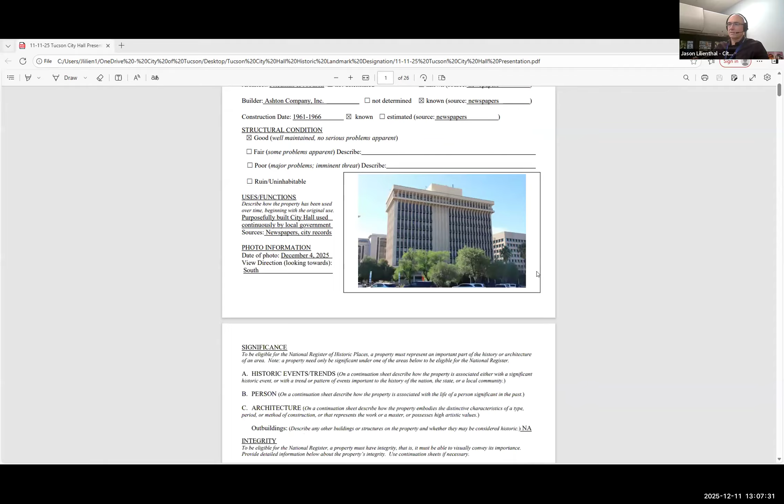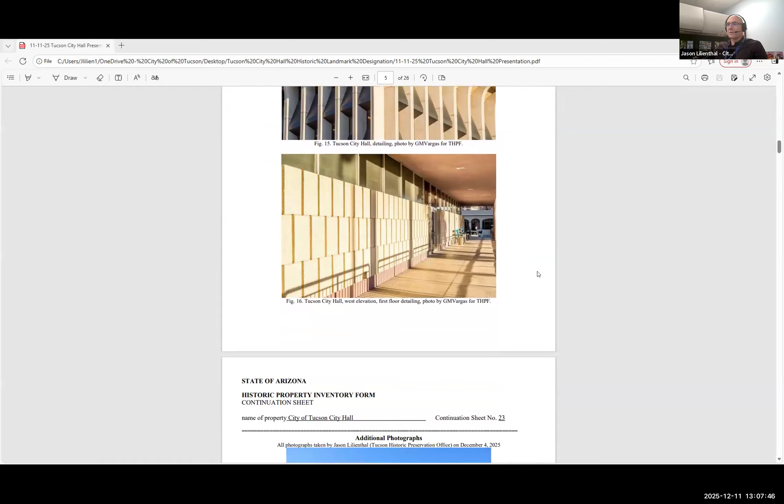It is eligible under two criteria: Criterion A, politics and government, and Criterion C, architecture. Under Criterion A is the association with Tucson political history. Tucson City Hall was built between 1961 and 1966. This is the third and only remaining City Hall building, and was the first new civic building erected downtown during the urban renewal era, predating the Pueblo Center redevelopment project approved by voters in 1966.

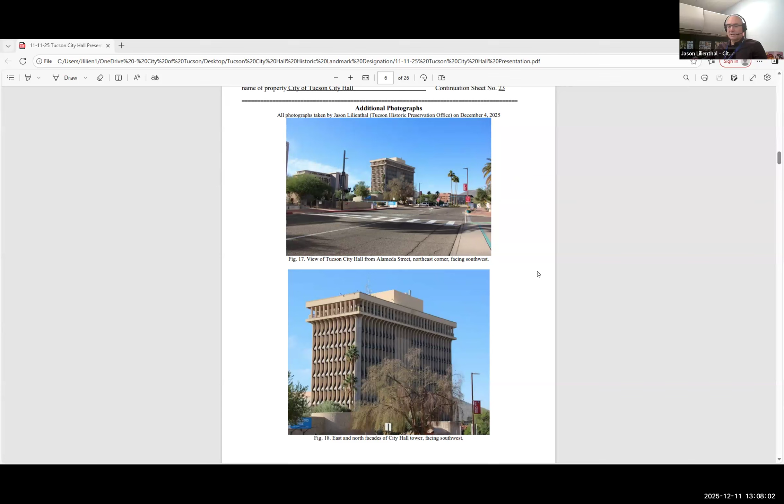Under Criterion C, this was built by local architect Bernard Friedman of the firm Friedman and Jobusch. It is designed in the brutalist architectural style. One of its character-defining features is cast concrete construction with steel beam framework and anodized metal copper. Its fenestration is recessed with overhangs to provide shading from direct sunlight. On the 10th floor, as well as the 2nd floor, there's a decorative screen of gold anodized aluminum rings arranged in a geometric grid. The design reflects its Sonoran desert climate with desert color tones. This concludes the presentation.

As Chair Majewski was mentioning, one of the things we're looking for is a recommendation from the Tucson-Pima County Historical Commission Plans Review Subcommittee, whether it's approval with conditions or denial. If it's approval, we will take it to the planning director, and there will be an official letter of notification, and then from there we go through the process. I can speak to the process if the commission would like to hear that.

Sorry, I was on mute. Would that be helpful to hear a little bit about the process? Does anyone want that, or are they familiar with it? This is Joe. I'd like to hear just a touch.

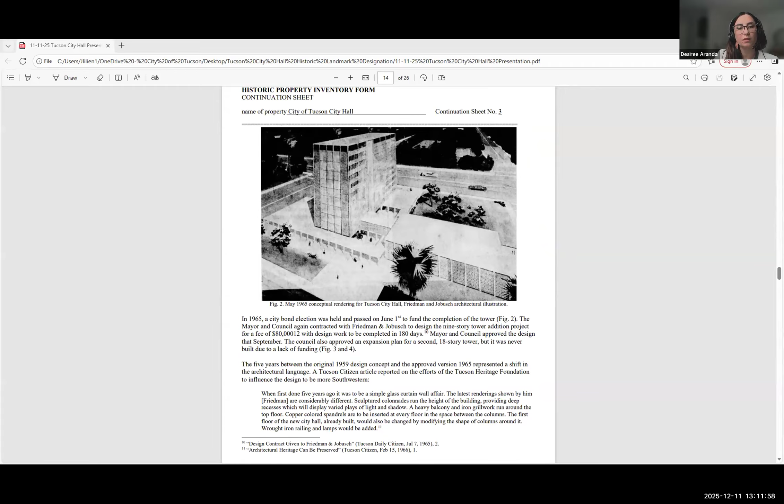And one other thing that I wanted to mention, mayor and council directive was to focus on the exterior of the building. And so we do document the interior, significant public interior spaces in the inventory form, but the final ordinance that will get adopted by them will most likely only pertain to the exterior. So that's something I wanted to mention. That's the direction that we were given.

So you put it in the HPIF format, and then there is also, this would be for a city landmark, right? That's what we're doing. Right. And for the UDC, there are different options, we can either accept a National Register nomination or an inventory form for the local designation. But it needs to be, was that changed up? Because it used to be that it had to be a nominated property, or does it just need to be an eligible property?

That is a good question. I have the ordinance here in front of me. Let me take a look at that.

And I do want to acknowledge the Tucson Historic Preservation Foundation, who originally submitted the application. Jason may have mentioned that, I'm not sure, but they submitted, they wrote the initial application. And so the inventory form really is based on their work with just some minor things added. And to your question, the ordinance says which are individually listed or are eligible for listing on the National Register of Historic Places at the local, state, or national level of significance. And this is at the local significance.

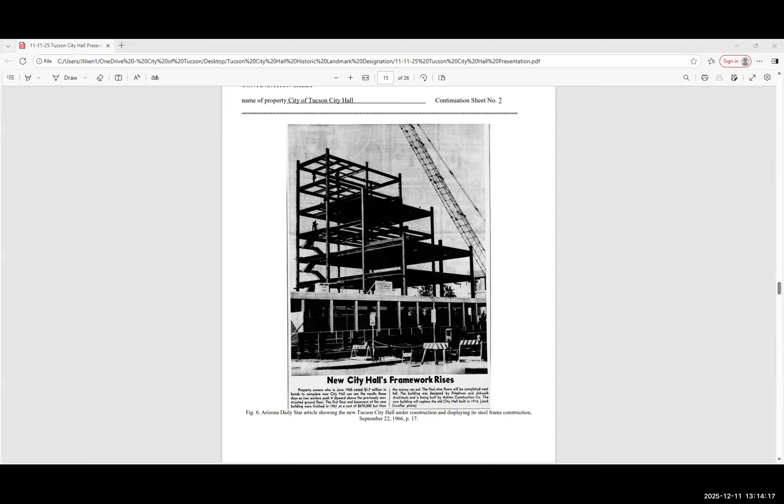And so for those people who don't know, what does it mean if this becomes a Tucson landmark, for the property itself? Just so that that's on the table. Sure, I can answer that.

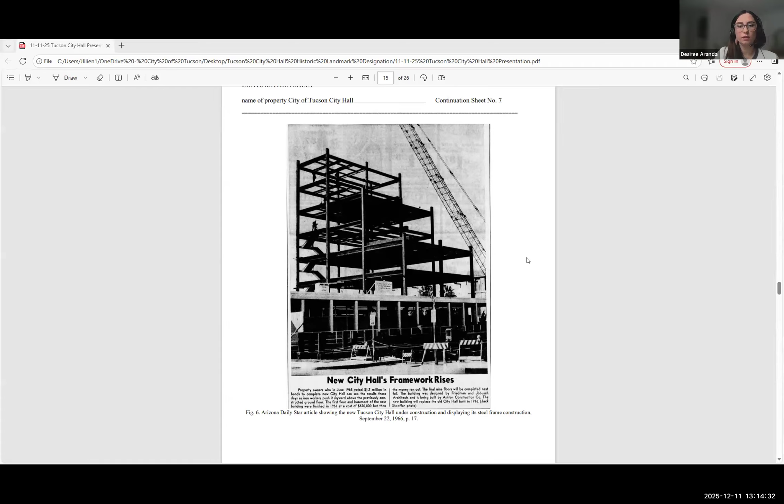So essentially this becomes a local landmark, which is an overlay, a zoning overlay. So the underlying zoning would not change, but this historic landmark zoning overlay would be added on top of that. And so any future development projects, proposed building alterations, again focused on the exterior, would come through the Historic Preservation Office for review. And so that would be subject to the review standards as outlined in the Unified Development Code 5.8.9. Because this is not in a historic preservation zone, it's just an individual landmark outside of that zone, any type of zone, the review body would be PRS, so this review body. And then any recommendation on those proposed alterations would be given to the PDSD director, who ultimately makes that decision. And those decisions are appealable to mayor and council. So essentially it provides some protection, there's also protection against demolition, right?

They're pretty... there's a specific process outlined for historic landmarks proposed for demolition. So if in the future this building, for whatever reason, was proposed for demolition, it would have to go through a process that ends at the mayor and council, requiring their approval before it can be demolished.

Basically, the city initiated the nomination—the mayor and council did. So it's not likely that the city will say that it doesn't want to have it, correct?

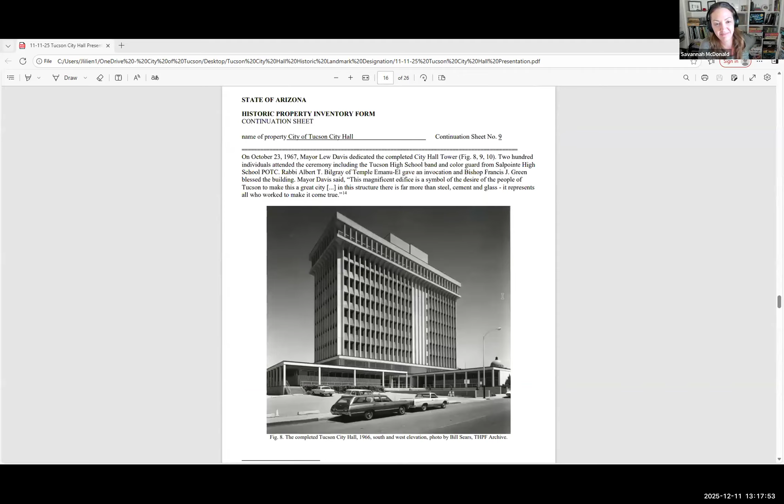Okay, cool. Yeah, I read through it thoroughly. I felt like there were just a few things. You had asked us a while ago to look at the character defining features, and some of them are a little bit missed or not described enough. One is the concrete panels on the first floor—I don't even know what they are because there's an image but no description. I think they're pretty special, pretty unique. It looks like cast concrete, like a veneer or something like that.

Also the colonnade of the first floor, I think, is pretty significant—it wraps around. That's mentioned a little bit, but not as a prominent feature, which I think it really is.

And then, within the cover sheet, or the second page, when windows are described, they're just called glass windows. I think there should be a little more specificity there. I actually marked it up a little bit—I could share it with you—but I think saying aluminum framed windows would help.

Especially since they're almost full height at levels 2 and 10, where the screen is—I think that's pretty significant, those two levels having bigger openings, more full-height storefronts. It looks like at the second level they've infilled some of those panels or put some sort of film on the window to block the sun more. I think that's happening on the second and tenth levels.

And then I think it's a copper panel, like a spandrel panel, so that should be mentioned under wall sheathing. Those copper spandrels are pretty cool too—I think that's what they are. There was another little snippet, maybe in an article, that mentioned it.

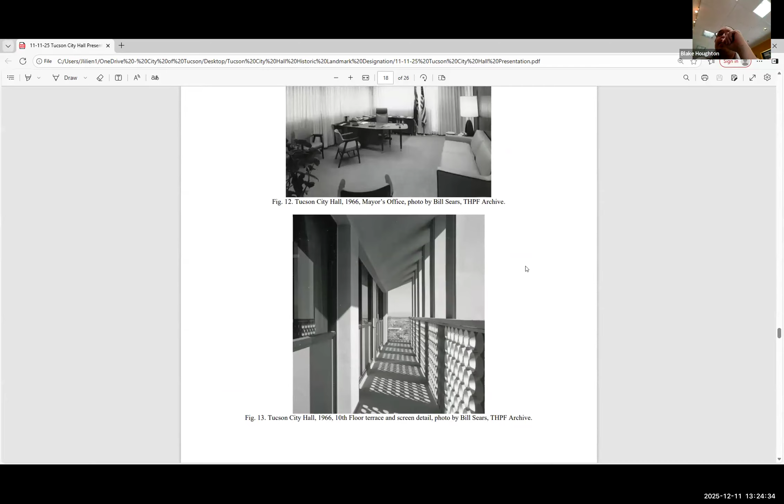Okay, thank you Joel. Blake, did you have anything to add? No, this is my first PRS meeting, first real run through, and joining this was a little chaotic for me. So I think all of the comments that have been made are good, and I'll just leave it at that.

Okay, thank you. I think what we should do for a motion is—so what is the schedule on this, Desiree and Jason? If we continued it, you've heard our comments and all that, but I think our main area of concern is the interior. And we've had this before. There was a property that...

The Tucson Historic Preservation Foundation brought forward one of those really interesting mid-century modern houses that had a big glass exterior. Do you remember? Are you familiar with that? It was before your time with the city, Desiree, but there was concern about interior modifications, because it was so critical—the whole interior worked with the exterior. And this is not quite the same thing, I don't think. How do you feel about that?

About waiting until you get clarification, or how do we structure a motion that would say we recommend moving forward with approval, but with the comments we've brought up and edits to the form, and also that some level of attention has to be given to the interior—but I'm not sure how we say that.

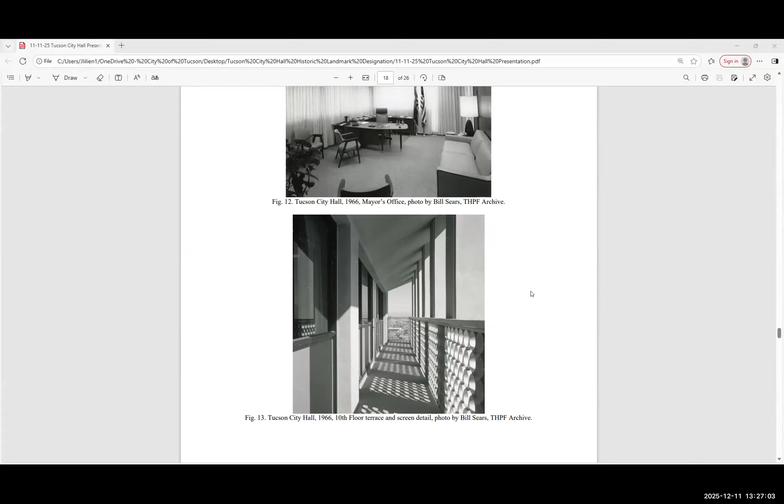I mean, if we could frame it—what do you think, commissioners? Do you think we can just frame it to cover those points?

I think so, possibly, yeah. My fear of pushing back too hard on the interior portion is that mayor and council may say no, and then just not list it.

In tandem with that, the other thing I'd want clarity on is where does that boundary of the exterior start and stop? Because the way the portico is designed, with steps that are integral to the portico and some hardscape elements, there's a really blurry line between the outside of this building properly and the greater civic plaza around it. It doesn't talk much about the greater plaza, but there is an integration there, so I'd want to be clear on the boundary.

To that point, I think Desiree had asked us, and I'm not sure I thought about it quite enough yet, about the landscape around it too. You wanted us to consider that.

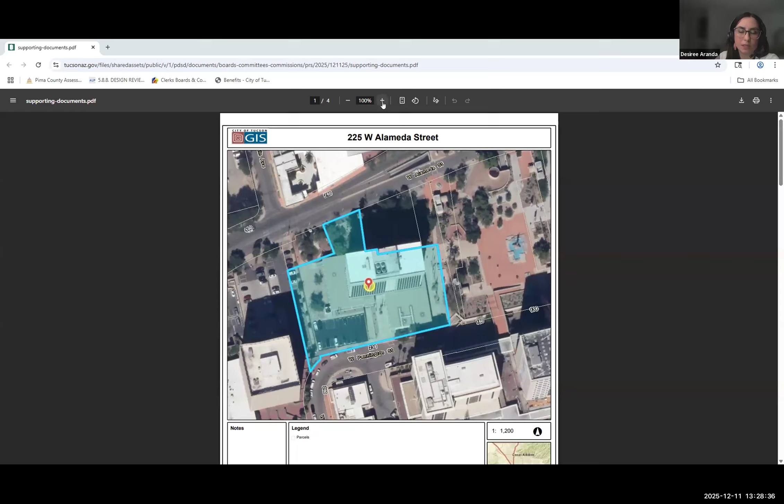The exterior, the first floor exterior, and exactly what Andrew was talking about, those landscape and hardscape elements - that might be the better way to describe it - like the steps that lead up to City Hall. I think we can certainly capture that in photographs, but if you all have thoughts about specific features to call out in the landscaping or hardscape surrounding City Hall, we could add that.

If we could go on a site visit or something, just walk around - I don't know if the boundary highlighted here captures everything that we possibly might want to include. This is the parcel boundary.

This line of questioning hits on something that is near and dear to my heart professionally - where does the building stop and where does the landscape stop? I think focusing on elements that were part of the original approach to the building, particularly because so much of that plaza is hardscape, instantly become parts of the landscape that need to be included and documented.

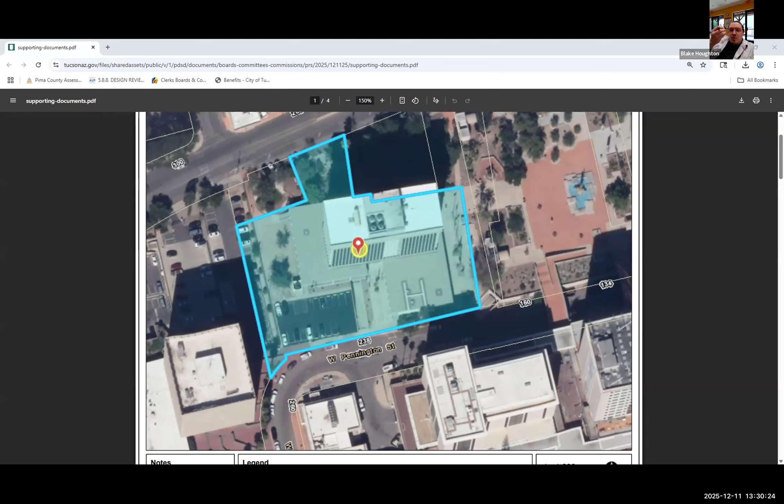At least in terms of ensuring - what is the word that I want? I was not prepared for this meeting. It'll come to me later, and that's going to drive me nuts because it'll be in the middle of the night. That essential quality that makes it historically significant.

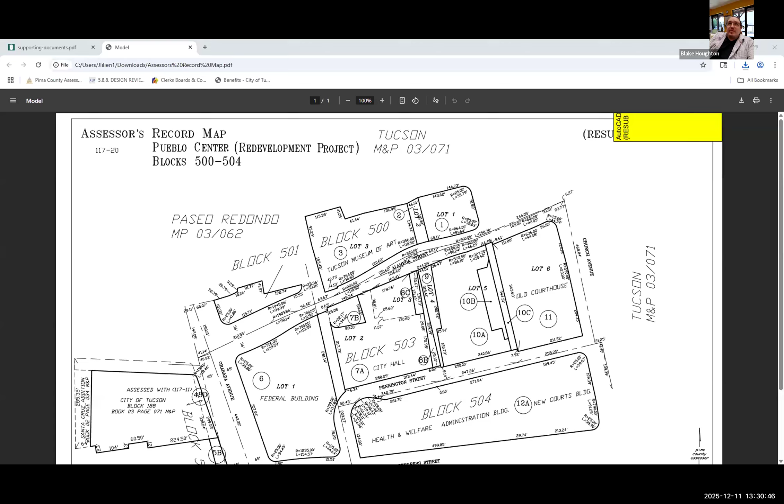Like a character defining feature - yeah, character defining features. But I think, because the plazas are in and of themselves designed spaces...

Do we know what the relationship between the plaza and the building was? Apart from what it is now, was the plaza designed and then installed around the building as a result of that? Was it designed by Friedman and Jobusch? You know what I'm getting at.

There's a certain part of this where some of this could be included because it was designed by them, or included as a feature. That's a whole bunch - landscape and where we cut that line becomes very complicated.

We've requested from the microfiche of all the permits that we have to see if we can get hold of the original design. We don't have that currently, but once we get that, it might give us some more answers. We can certainly try to do a little more research, see if we have photographs that could tell us. But my sense is there's not a ton of landscape right around it, and my sense is that it was part of the original design - I don't know how much of it has changed, if at all.

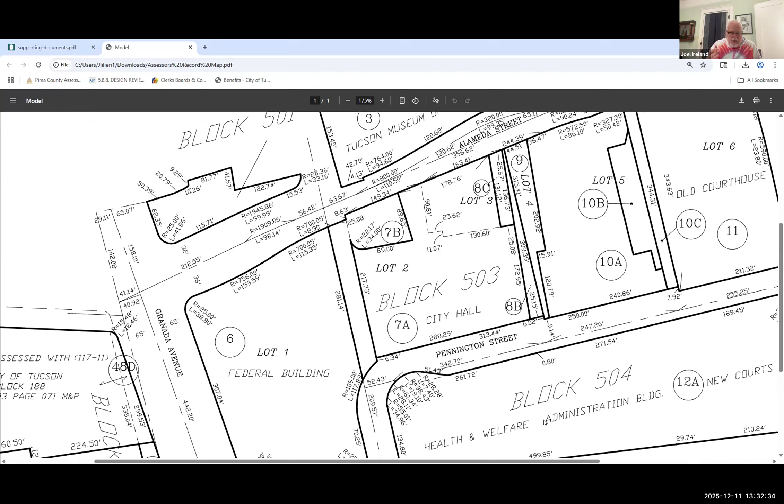This is Joel, and I'm agreeing with this whole discussion. One way to approach it might be that we recommend it move forward with a couple of caveats, so long as we're in compliance with the provision of the UDC that Andrew pointed out, and there are clarifying definitions of the interface with the original appearance of the hardscape and approach to the building, or something like that. I can't form the motion, but that's just maybe one approach.

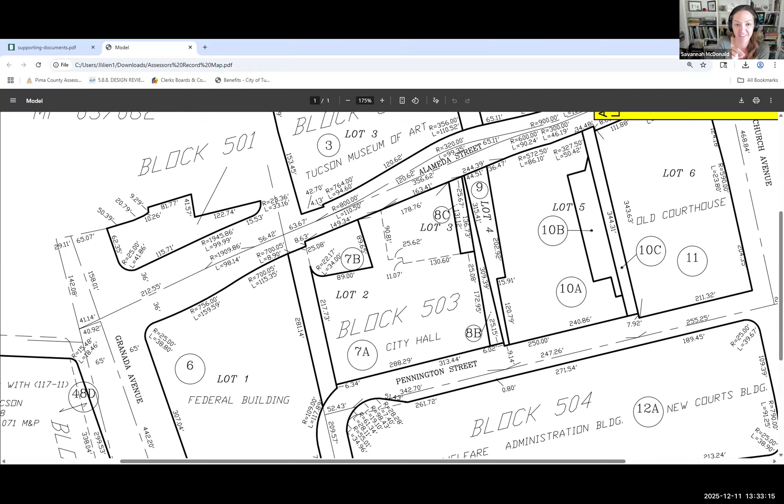I was just building on the previous comment. I've done the HL before with a very specific boundary, like 5 feet off the wall, including the yard of the street - fine tuning more around the building to capture within the HL. So it seems like that might be a more comprehensive approach.

So do we feel like we can craft a motion with all those caveats, or do we need to continue it? It would be you or Andrew, or you two putting your heads together on the motion with us weighing in. Is there real pressing urgency on this, Desiree, from mayor and council?

I don't think there's urgency for mayor and council. I know the Tucson Historic Preservation Foundation would like to see it move forward. Also, the rezoning process can be a 6 to 8 month process, so that's just to keep the overall timeline in mind. But I'm not sure that continuing it would severely delay things.

Your next meeting is January 8th, so that's a month away. I think in the grand scheme of things, that's not a lot of time added. As long as they don't have a big ceremony or something planned on a specific date that we're going to blow, then - yeah, that's my feeling. I don't know how everyone else feels, but I would probably want to just continue it.

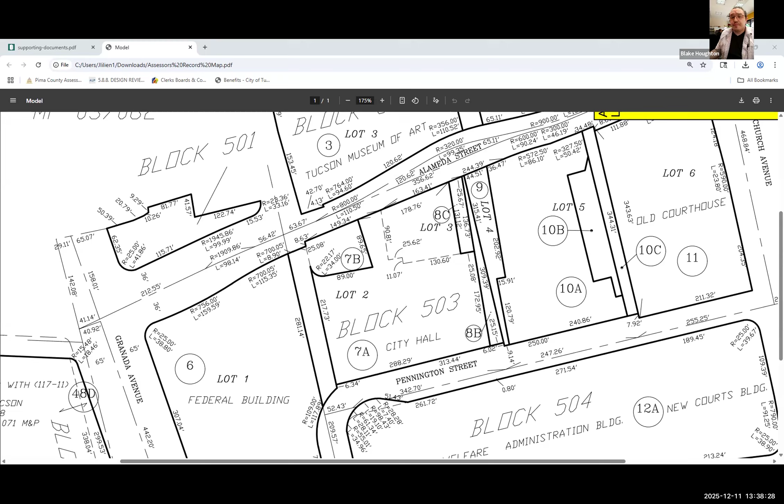Okay, is there a second? I'll second. Is there further discussion? Okay, if not - Terry votes aye. Andrew? Okay. Blake, aye. Joel, aye. Savannah, aye. Great, so it passes unanimously, and Andrew, email that to us so we have that.

And I think that's smart. So thanks for all the preparation, Desiree, you and your staff did, so that we can move this forward at some point soon. Thank you all for your comments.

And if commissioners would like to do a site visit, as long as there's not a quorum, one or two of you, I would be happy to arrange that or attend with you all. If there's a quorum, then we need to agendize it - all you have to do is agendize it. Yes.

Item 5 is historic preservation zone review cases that we review under UDC Section 5.8/TSM 9-02.0 Historic District Design Guidelines and Revised Secretary of the Interior Standards and Guidelines.

Case 5A is SD 1025-00158/TCRES 0725-03553 at 330 East 13th Street. I'm going to go ahead and turn it over to Michael Taku for background, please.

Yes, Madam Chair. The project before you—let me make sure the applicant is here today. I'm here, Michael. Okay, so we'll make you the co-host when I finish with my presentation. So the project before you,

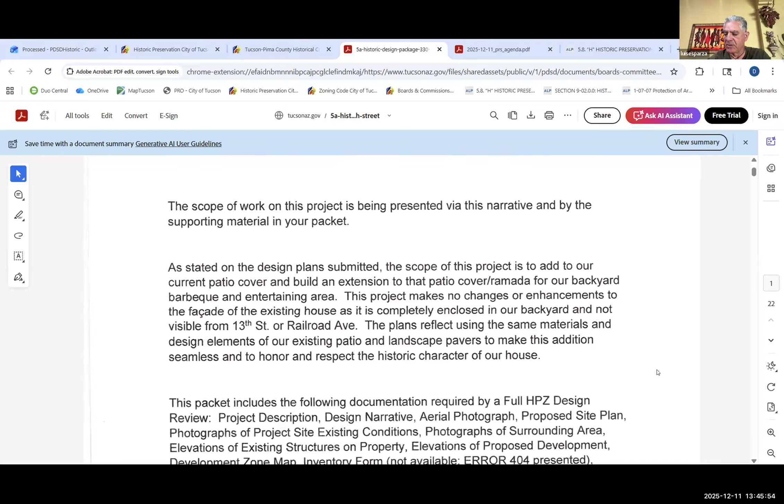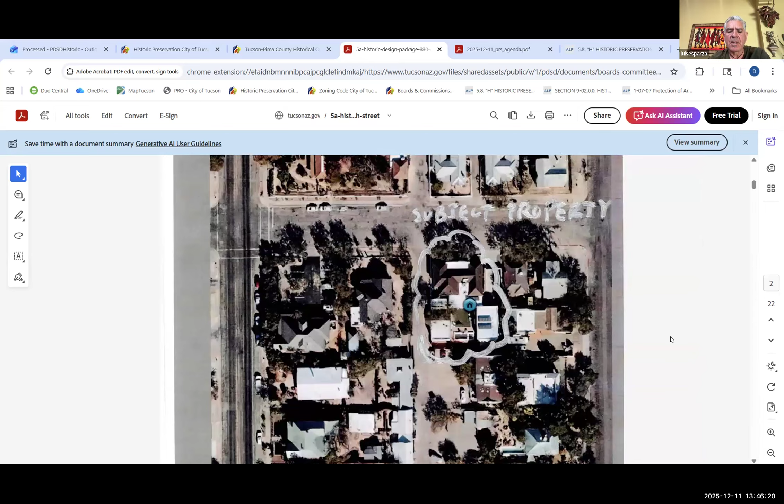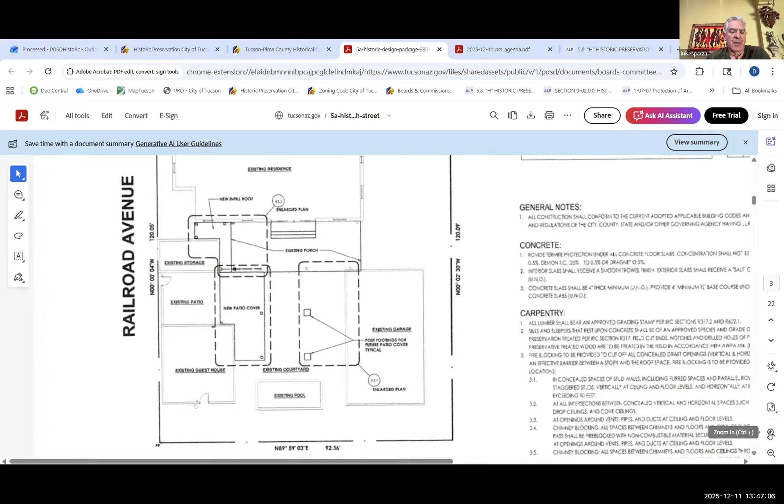Due to some requests, we submitted to the Armory Park Neighborhood Historic Association for review in November of this year. The project is basically an extension of our patio to cover our barbecue area and provide extra shade. Part of that is an extension of the current patio cover and the infill that Mr. Taku referred to. As you can see on the screen, the infill part is basically a 9 foot by about 15 foot area that runs east-west, and a 5 by 18-foot area that runs north-south between the existing house and the existing storage area.

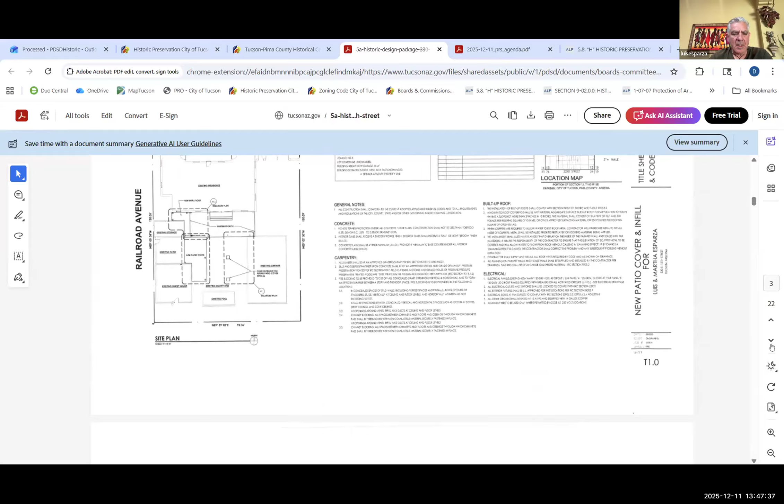We agreed that the posts for the future patio will be removed from the plans so that all that is being presented is the current work shown on the plans that were already submitted. Any questions? That's basically the project.

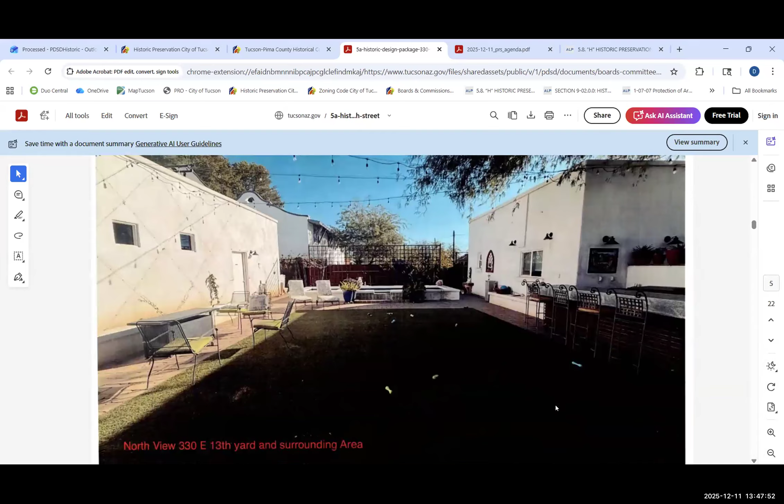Are there any questions from the committee? Okay, let's go ahead and start. Who would like to begin? I can. My initial question is on page 16, west elevation new. That's actually looking west, right? That's looking west, yes.

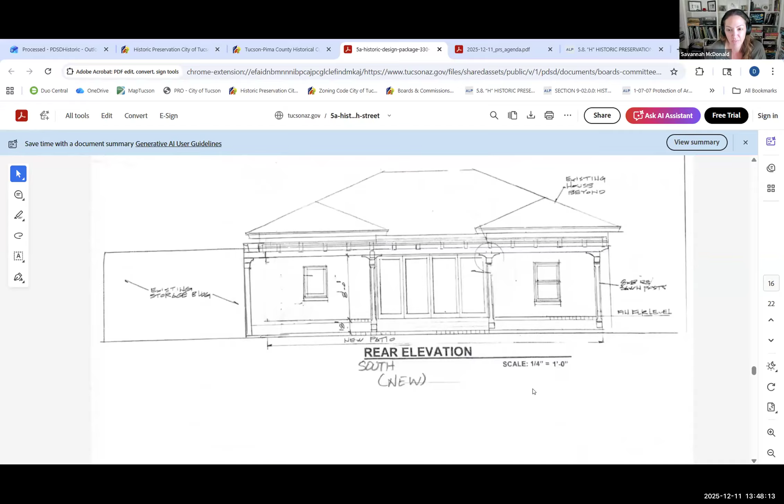So the materials configuration, even the detail right at the top right of the beam there. We go, it's one above that. There you go, so that's actually looking west. So we see the extended version. So all of that is intended to match the same design that you have existing, is that right? Yes, it's exactly the same as what we have now.

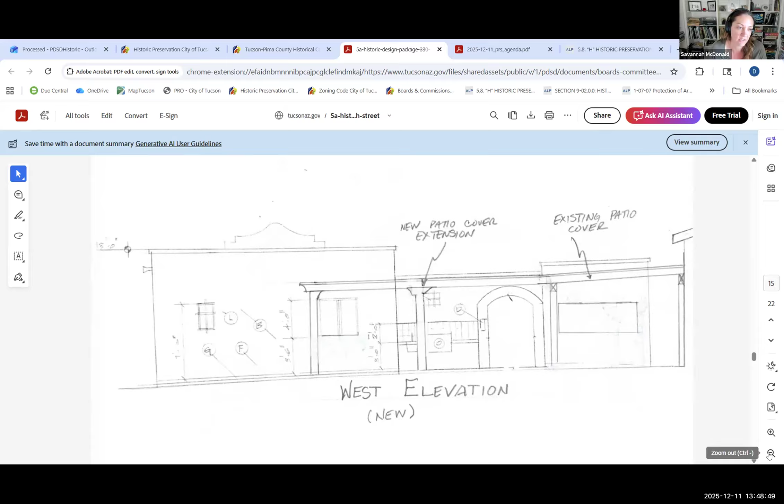And then Michael mentioned a new roof on the west side of the house that you might see from, is it Railroad Avenue? Do you have an elevation of what that will look like if we're going to add that to our review?

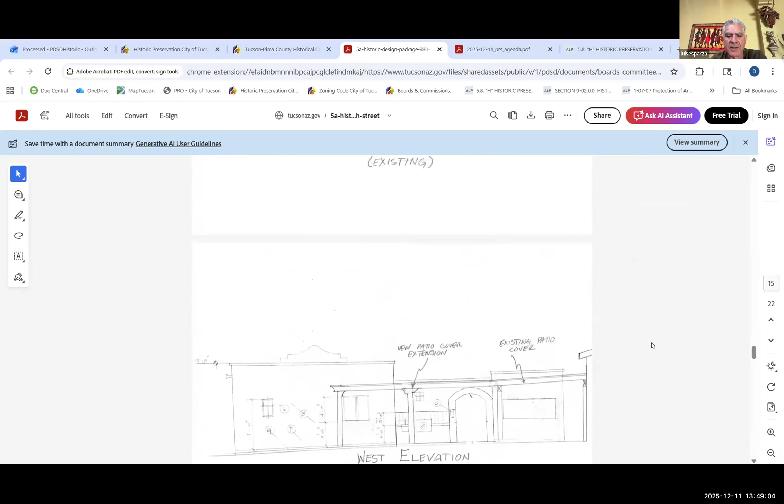The only thing, if you go to the photos of the west view, right there, okay, right above in between the two buildings, you have that little arch. The only thing that would be visible would be a beam behind that arch. That's just to allow drainage onto the roof of the existing storage area.

Okay, but you don't think it would be low enough that it wouldn't be visible from the street? This is from the alley, from Railroad Avenue, in the back, yeah, the beam would be visible. So Railroad Avenue, that's an alley you said? Yes, it is.

I think that's, I mean, I see no real issue. I think that's not covered in the documentation currently, but I don't see any problems with it. Okay, thank you, Savannah.

Andrew? And that would be the only part of this project that's visible from Railroad or from 13th Street. Right. Okay, and actually, can you go over, are we adding the post footings to this review, or what's the intention there?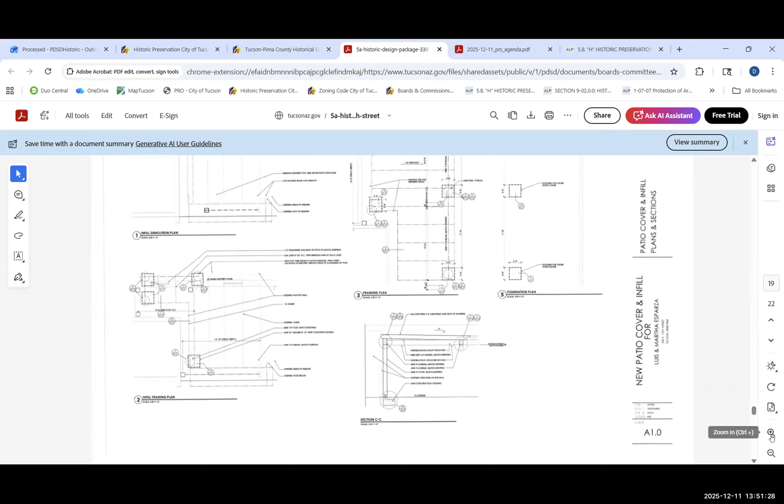My one comment I have is on sheet A1.0, titled Section CC. I guess I wasn't clear where that section is being cut, or is that just a typical section through the new patio cover? Let me see. Oh, I see it, it's up at the top, right at the joint. Yeah, okay.

I just want to make sure, because it's showing the low end overhang with that shaped rafter tail profile, but on the high end it's just showing a flush cut joist. So I just want to make sure we'd have the same overhang condition on both sides.

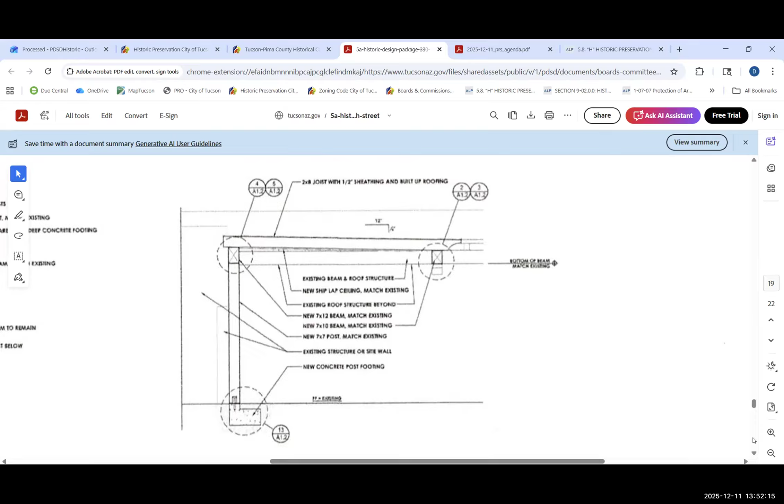Okay, yeah, the post on the left that shows the flush cut is where it extends from the connection on the current storage area to the other end, and that was just a continuation of that rafter. Okay, so in other conditions, like if you were to slide that section line down where we don't have an adjacent building on that end, would you treat both overhangs the same then?

We had left it that way partly because there's a patio to the left and there's a tree. But for the rafters that stick out, as it's drawn, that's how it was typical. But if that's something that needs to be taken care of, that could be added. Okay.

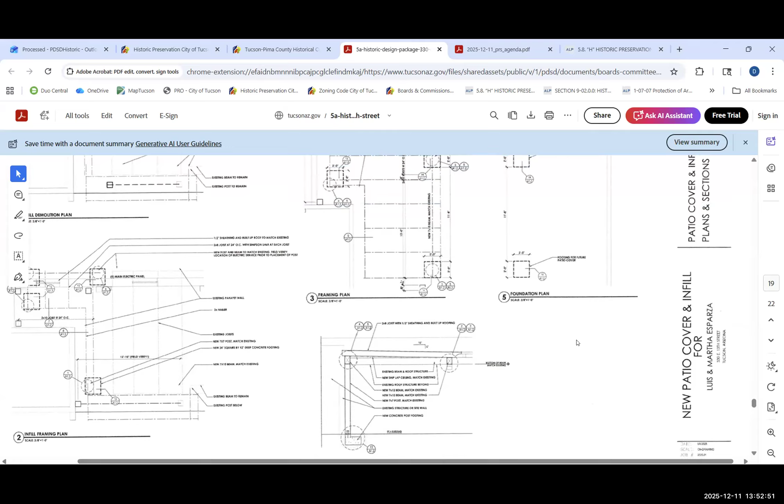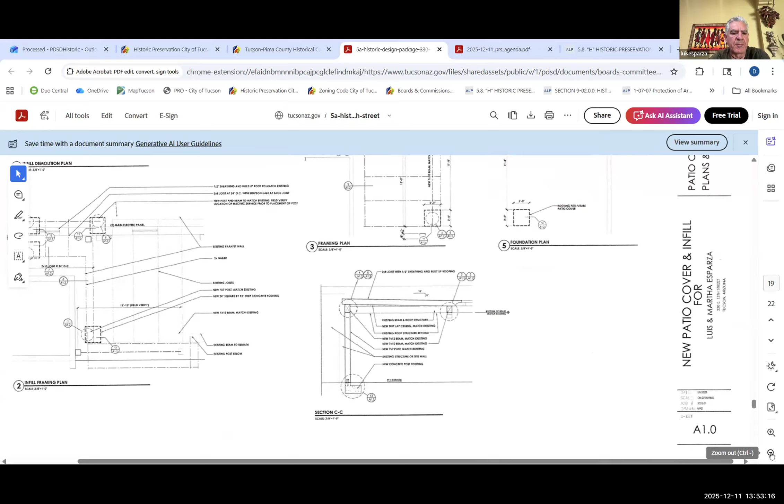I think that'd be my only thing, because that would be visible from Railroad, right? Actually, it would not. No, okay. Maybe I'm not understanding the plan then, like which adjacent walls are full height and which are patio walls. Okay, for section CC, if you go to page 3.

That section CC is the new extension outlined in that rectangle. To the west of that is a patio, a courtyard for the guest house. The only part that would be visible is just above that, the part that's marked for new infill roofing.

I see. So the walls for the area labeled existing patio, is that a full height wall? Yes, it is. It's about a 12-foot wall. Okay, I wasn't understanding that then.

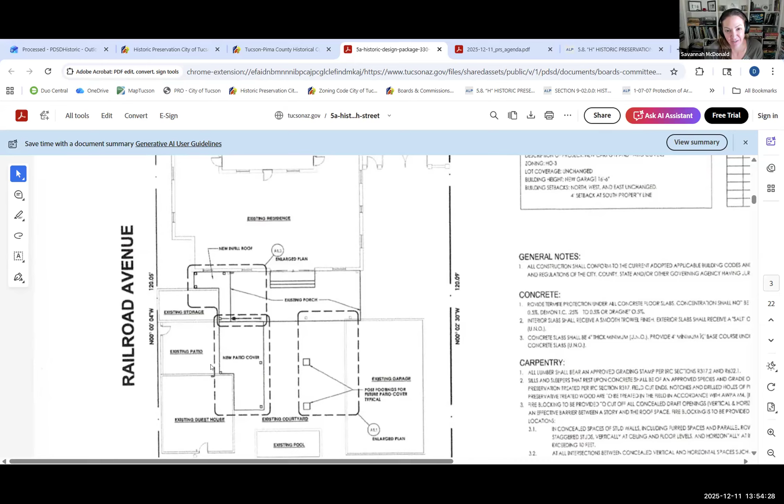All right, okay, I'm good then. I agree, that would be nice, just architecturally, to have that fun little detail at the end. I think anywhere it's not butting up against a wall or a building, the overhangs should be treated the same way with the shaped tails. But that can certainly be a motion if you wish.

Blake, do you have anything to add? No, I'm good on this one. Okay, Joel? No, except I follow Andrew and Savannah's comments, but otherwise it looks good.

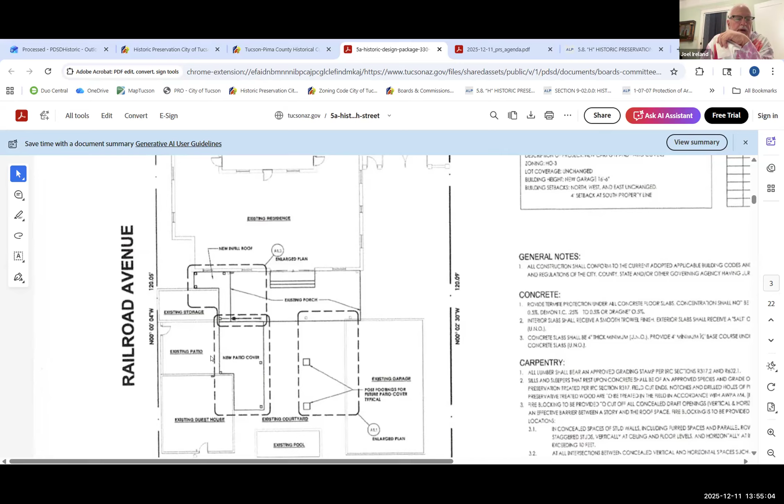Great, thank you. So who's wanting to make the motion on this one with these details? I can do it, one sec to write it out, because we're going to kick the future pier footings out. So how do we want to address the roof extension, the infill roof as it was labeled on the site plan? Okay, so we'll just say the infill roof is approved as presented.

Okay. Still ruminating, Andrew? Just finished typing it up. All right, perfect, thank you.

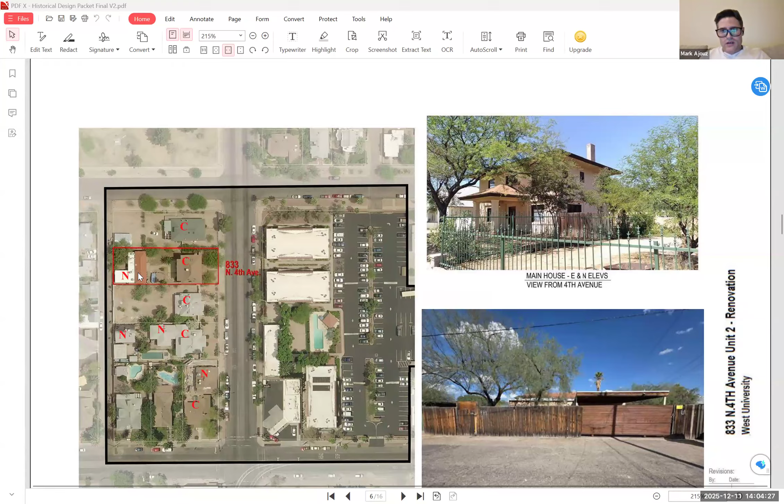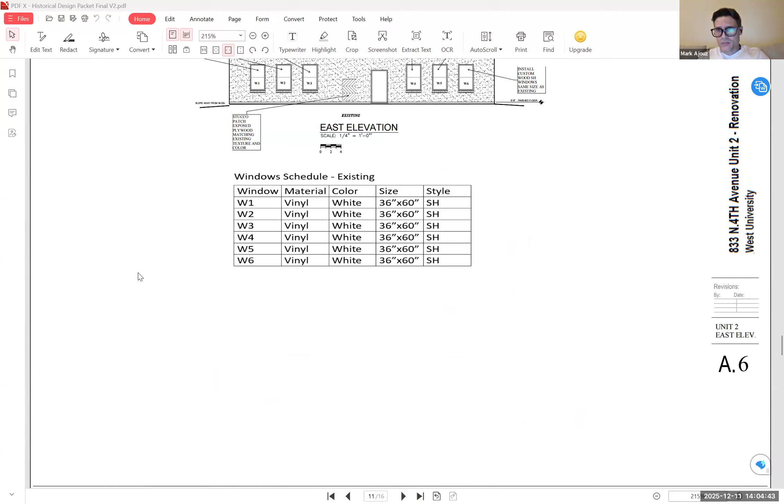Okay, I'll start by showing this back structure that's in question, which is what the application is for. Like Mr. Taku said, we're proposing to replace the wrongfully installed vinyl windows. I think it's important to mention that my father inherited this violation when he purchased the property. I just think it's important to know. Thank you. So this is the east elevation.

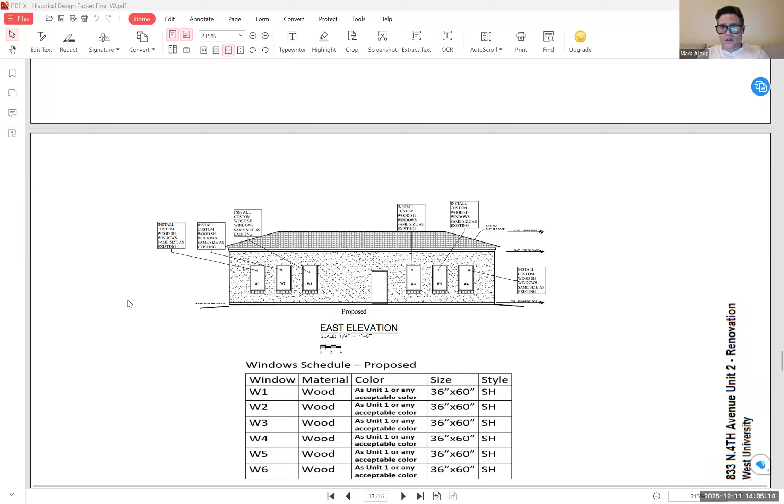All 6 windows on the east elevation are going to be replaced with single hung wood windows, same exact size, and the color will be the same exact color as the front structure, which is brown. We're also proposing to do any stucco patches or repairs to match the existing color and texture. On the south and north sides there are no windows, but we're proposing the same stucco patches and repairs to match the color and texture.

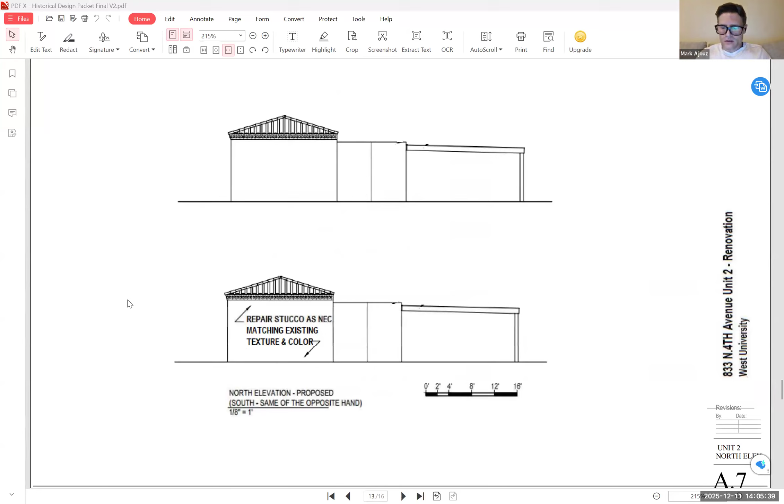Apologies. And then on the west elevation, we'll also be replacing all the windows with single hung wood windows, and also doing any stucco repairs or patches to match the existing colors and texture. And that's about it.

Thank you, Mark. Who would like to begin with questions? I can start. I think, although the windows look fine to me, if everything's matching the opening sizes and you're using wood, I don't see any issues.

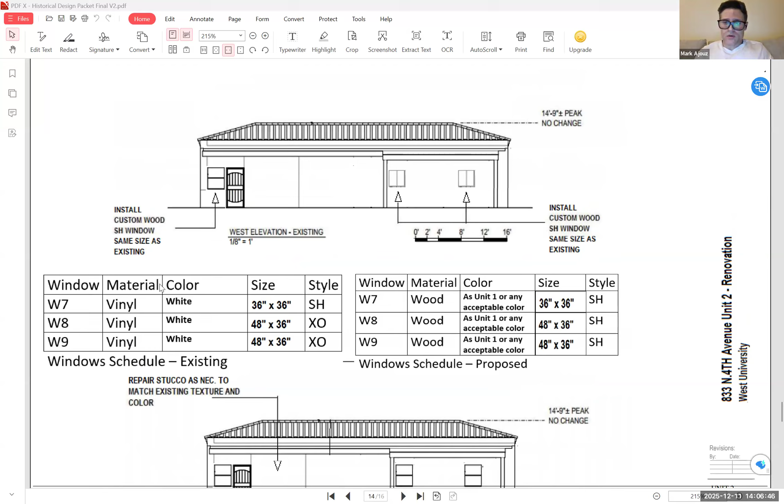I was looking at the code violation and it mentioned mechanical work. I don't know if that's true, but is there any mechanical equipment that's been changed on the outside that'd be visible? No. Mechanical work was done on the building in front, not on the second building, and that was resolved as a minor review for Unit 1, which is a contributing property. Exactly. Great, thank you, Michael.

All right, yeah, this looks good to me. Okay, who's next? I'll go, I think it looks fine as well. I have no issue, I just, wood doesn't last super long, as lovely as it is. So as long as the applicant is aware they have metal clad wood options that would be approved as well if they want something longer lasting, but just making sure that's known. Thank you. For West University, the clad is fine, right? That's my understanding, yes, they would accept wood clad on secondary buildings, not on the primary.

Right, so this one is a secondary building, so if they choose to do wood clad here, they can do it. Thank you for letting me know. Appreciate it, thank you. I'll tell my father, thank you.

And we can give them more options, and it might last longer, right? Or it will last longer. Yeah, we can put that in the motion too, that they have the option, don't you think? Yeah, that would be great. Thank you, okay.

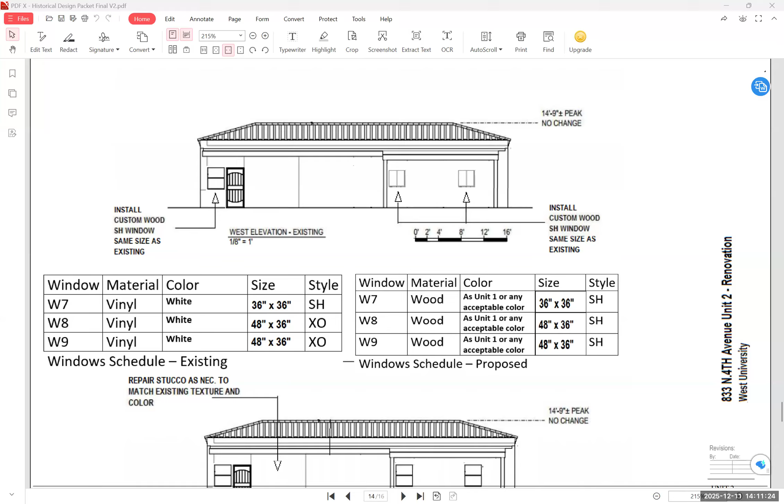Okay, now we'll move on to item 6, which is a courtesy review. 6A is 900 South Randolph Way, for the Outdoor Performance Center at Reid Park. Desiree is the staff contact on this one, and I believe we have the applicant, Joe O'Neill, from Parks and Rec, who will probably be presenting. So go ahead, Desiree.

Okay, yes, so we have a couple presenters here today, but just a little background. The Outdoor Performance Center at Gene C. Reid Park is identified in Proposition 407 for renovations, including a complete remodel to the backstage area, AV systems upgrade, wrought iron fencing and gates, new seating, and ADA improvements. The Historic Landscape Subcommittee of the Commission did conduct a courtesy review for the project on October 30th.

Some of the comments they had: they understood the need for the fencing and requested additional gates on the west side of the amphitheater. The definition of the southern boundary of the amphitheater is positive and would benefit from succession planting for the pines currently present there. They recommended not removing the grass between the interior and exterior of the fence line. Commissioner Houghton is part of the landscape committee, so he can add anything or answer questions if they come up.

But right now, I will turn it over to the applicants. Okay, so we have Michael Becherer. Michael, you're presenting? I think so. Joe, do you have anything else you want to add, or you want me to just jump in? No, you take the lead. Okay. And Nate is in your office, you said? Yes, Nate Miller, okay. Yep, so good afternoon, my name is Michael Becherer.

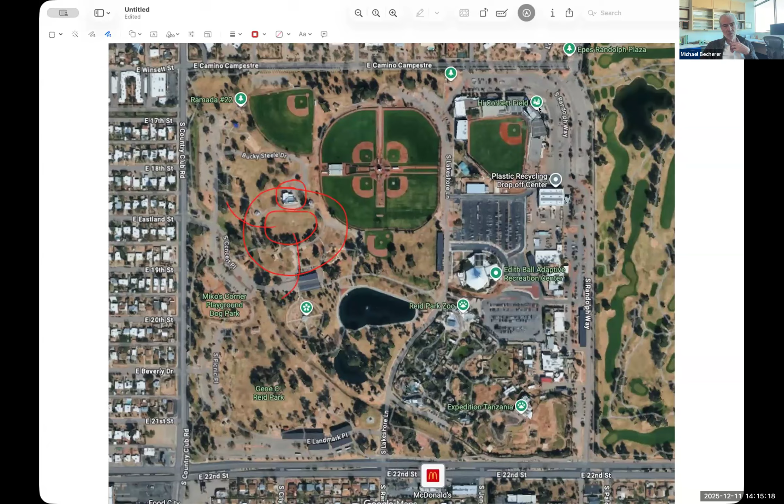There's really a variety of ways the public enters this, primarily from the south and the west. We'll get into a little more detail on that. Let me switch what I'm sharing here.

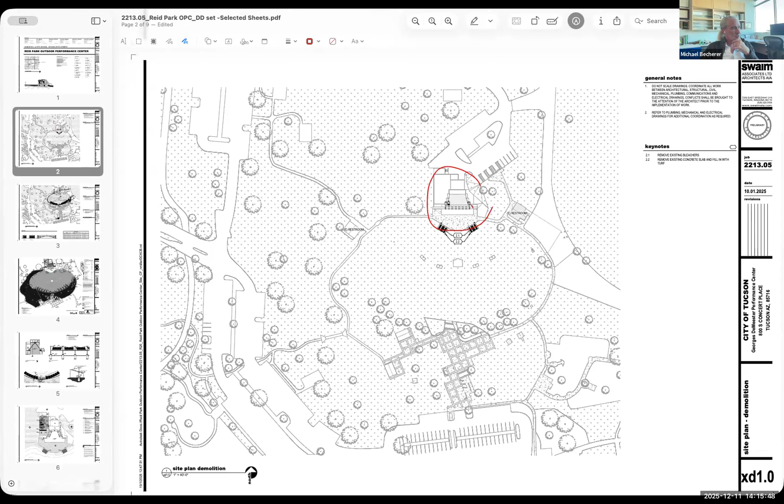So this is our current drawing set - this is the existing site plan. What you're seeing here is the building itself of the DeMeester Outdoor Performance Center. The stage is on the south side of that, and this is the audience area. There's an entry plaza on the south side that we're not making really any modifications to. The focus of our modifications is on the building itself and then on the audience area, particularly on the back side of the lawn.

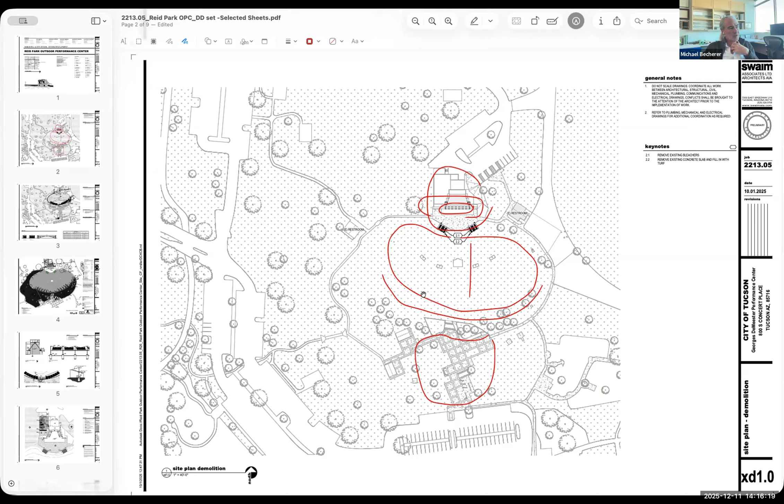There's a hill that rises up from north to south, and on top of that hill we're proposing a shade canopy that's going to provide both accessible access to the top of the hill, as well as shade for people at that location. So this is the site plan that we currently have - let me zoom in a little bit on this.

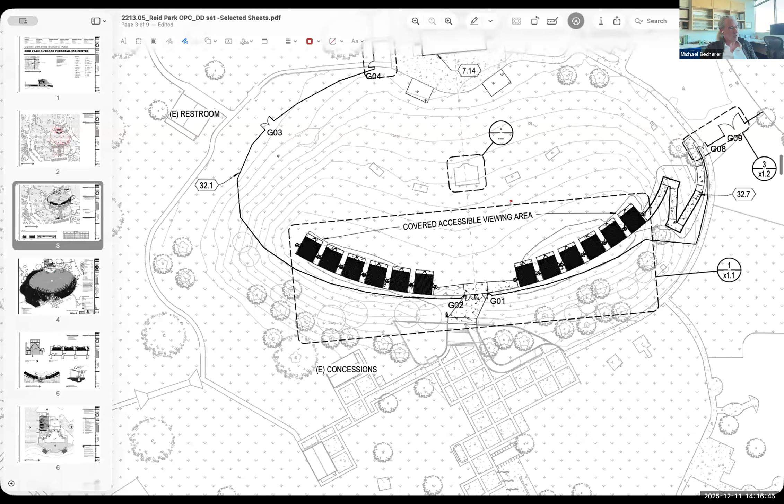So if we go south to north, there's a parking area to the south. We're making some minor ADA modifications to the parking area. There's an existing ramp that comes up with an existing stair - currently it just ends in dirt right about here. Our intent is to continue the concrete and a sloped sidewalk to bring you up to a vantage point at the top of the hill to look down into the bowl of the audience area. We'll have a sidewalk extending in both directions providing accessible access across the top of the hill to a series of shade pavilions where people can sit and watch the performance from this location.

On the east side of the site, we're going to put in another ramp that will bring people back down to this area, west of the audience - or east of the audience area - that traditionally is used for food trucks and other vendors. That will continue to be its use, but we wanted accessible access to get there. It also provides accessible access to get all the way to the building itself and to the restroom building. No changes are proposed to the restroom building at this time.

Of the major site features and changes we're doing is this shade canopy and sidewalk and associated ramp. We are proposing a fence that would enclose the entire audience area. This provides a couple of different reasons - one of them is security. Currently it's just an open field to the rest of the park, so it provides some level of security. It also puts in place the required fencing for a liquor license.

We know that for many of the local events that want to use this space and would like to have liquor sales or be able to generate revenue, it's cost prohibitive to put in temporary fencing. So in an effort to expand the usage of this and have more frequent usage of this facility, the city is electing to install a fence around just the audience area. This would be a 4-foot fence, primarily transparent, a mesh material, so it would have as little visual impact as possible on the landscape.

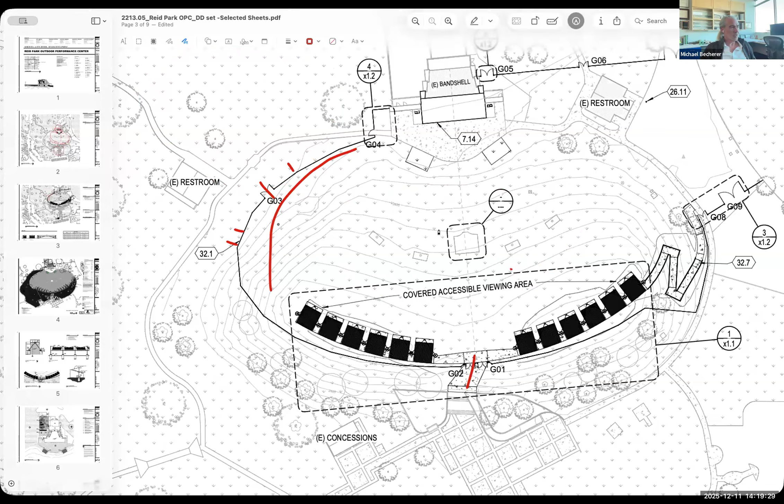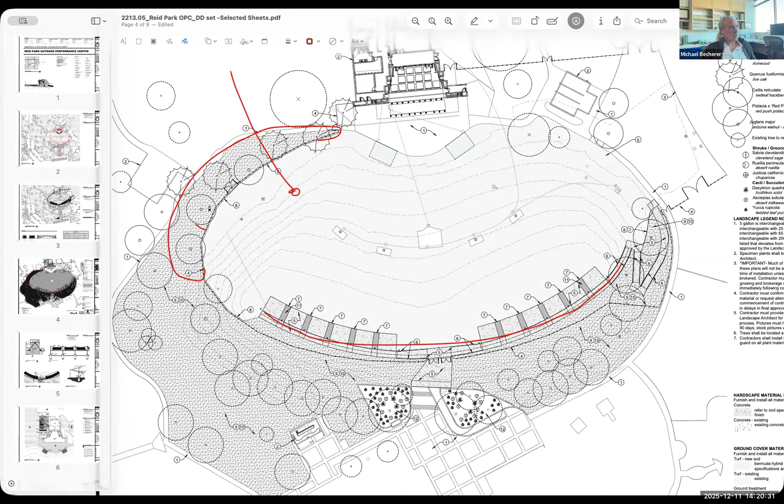The turf comment was really about this area here. We were looking at turf reduction, and they basically asked us to leave the turf in this area because of the connectivity from the current audience area up into that northwest lawn. So we are going to make that change to preserve that turf area and add those additional gates along the west facade.

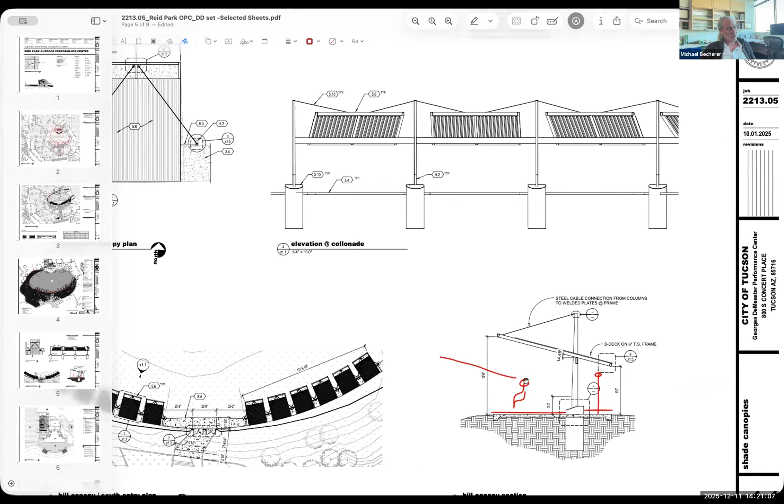The shade canopies themselves are a fairly simple cantilever structure. In this drawing, this half is where the sidewalk would be, so an individual would walk here, and this half is the audience area where someone could sit and watch a performance. It also offers the opportunity for vendor stalls if there are other events going on, so we see this having multiple uses, not just as an audience area. It's a cantilever structure with a cable stay that holds the outside edge of the canopy, to preserve the view angle open from the structure down to the stage itself.

When we get to the actual DeMeester bandshell, this is the stage area of the band shell itself—the rest is all back of house area. We're making some basic upgrades to the back of house on the interior.

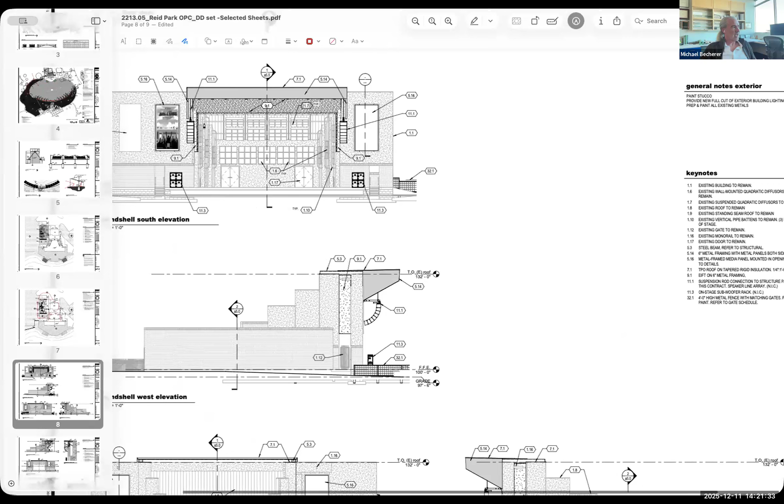The major change to the band shell itself is that we're adding another canopy extension along the front. You can see it—let me actually go to the section, it's easier to see there. So this is the canopy extension.

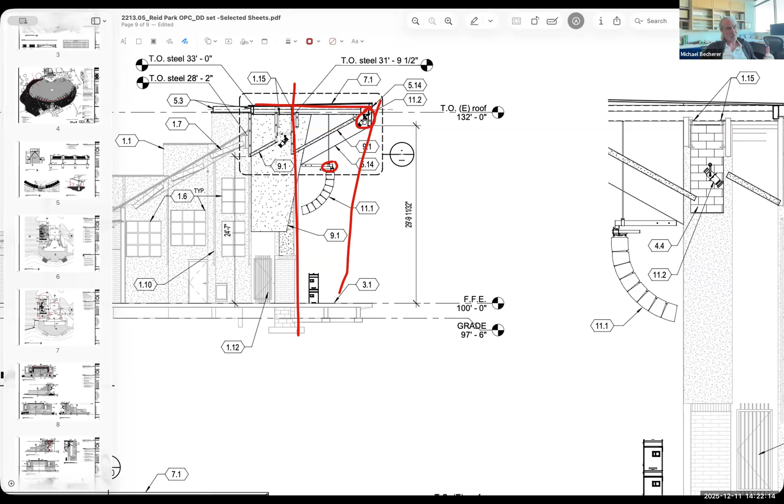Currently the band shell proscenium ends right about here, so we're providing about an 8-foot extension. This is really to get additional sound and lighting positions further out in front of the actual performance area, and provide some shade during certain times of the year. It faces south, so it's a little bit challenging. So the real purpose for the extension is, again, for these additional sound and lighting positions, and also to update the overall appearance of the band shell a little bit.

The original structure is from the mid to late 80s, so it is fairly dated at this point. We're trying to at least give it some upgrades in terms of its visual appearance.

If you look at this set of drawings, this would be the elevation of the new structure. It's really just this area here that's new—everything else is an existing part of that structure.

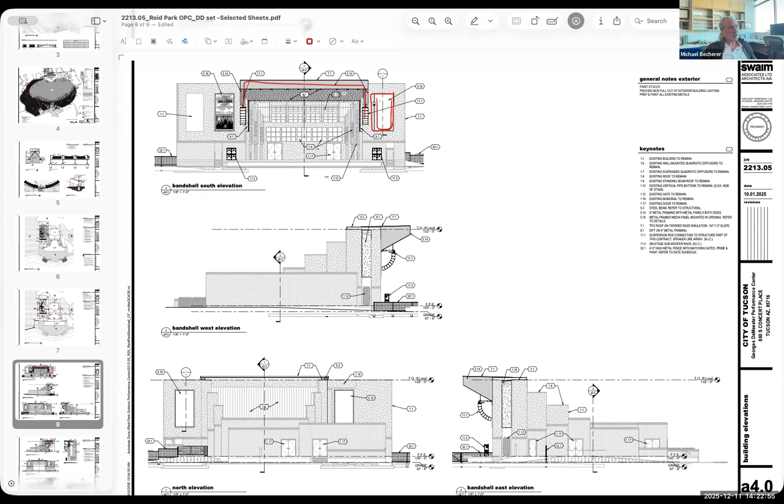There are some openings in the existing band shell that we will hang banners in. We're showing those filled in this drawing, but those would remain open. Frequently, parks will allow users to hang banners and other things in those locations, so that would continue.

Quickly, I can show you a couple other documents.

Michael also mentioned that the existing art will not be touched. Absolutely, yeah, there is an existing public art piece that will remain in place.

Michael, is it not up yet, or is it just me? I can see it, Terry. Okay, I got it now. It's just a little bit delayed on my end.

Let's see. Let me stop sharing that. And then we have a couple of renderings I'll show you, and it'll pretty much cover the majority of the scope that we're talking about. Share again.

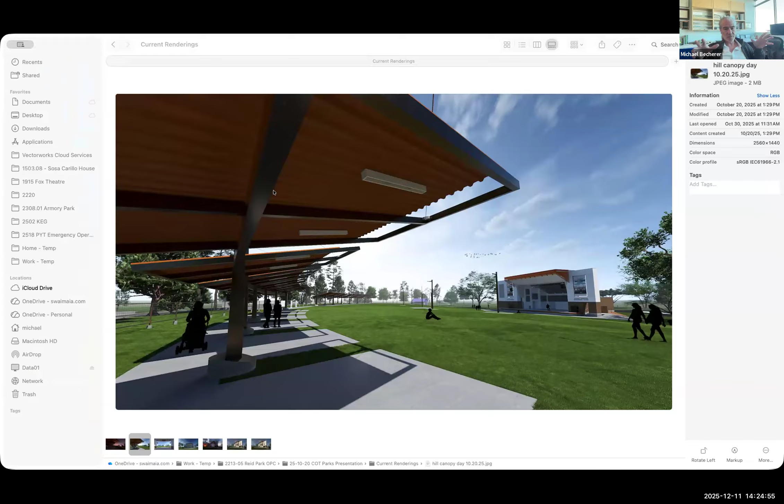Okay, so you should be able to see a rendering now. This is really from the top of that canopy, looking west. You can see the existing outdoor performance center with the new proscenium extension, and we're standing underneath that new colonnade that really creates the back side of the bowl of the audience area. We feel this is going to make it feel more of a formal, contained performance space than it is today.

The fencing is rendered in this image, but you can see it nearly disappears, which is really the intent. You can sort of see it on the left-hand side of this image just a little bit.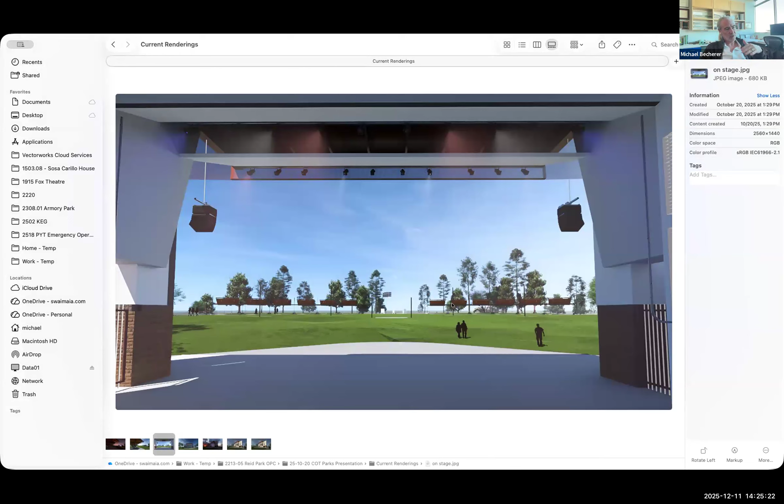This would be the view from the stage itself. You can see the canopy, and the angle of the canopy is set up so that it really has a light visual impact on the overall hill and on the park.

This is straight on to the performance stage. Again, you can see where that canopy extension is, which is really the extent of the work we're doing. This is more of a dynamic shot to show it in the evening, and then a little clearer shot during the day, so you can really see the geometry of that piece as it sits over the stage.

So again, the primary components of this are the extension of the proscenium, the fencing, and the colonnade across the top of the hill with the accessibility enhancements we're talking about, to make this a more accessible, secure space so that we can have a wider variety of events, plus enhancements for the AV and lighting for the stage itself.

So did I miss anything, Joe? No, you covered it pretty good. I would just add that some of the interior work is bringing the bathrooms up to ADA accessibility and current standards with the restroom and changing room.

Okay. All right, do we have any other comments that we wanted to share? Because it's a courtesy review, we don't do a motion, we just provide our comments.

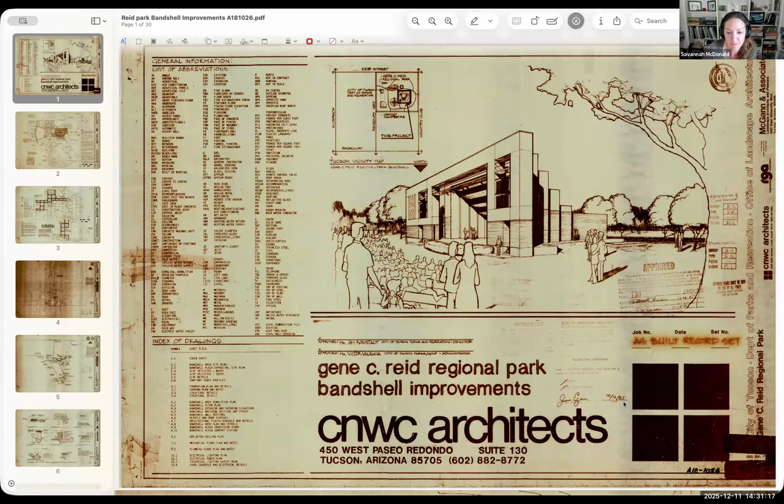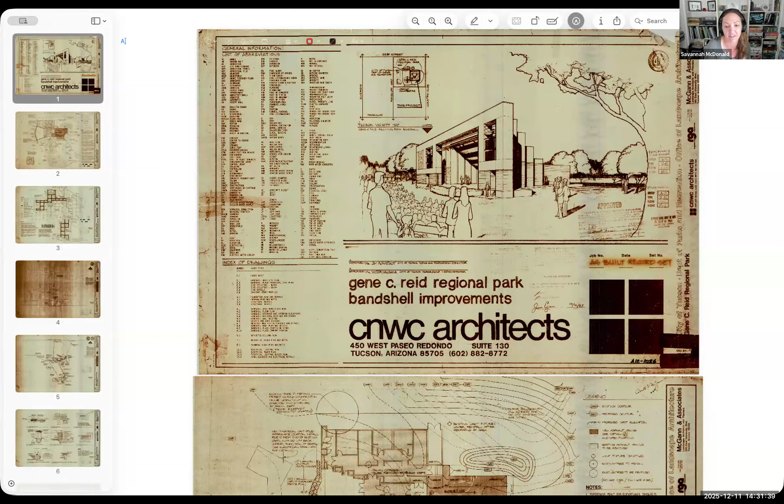I asked because I know it'll go through this process, and we're looking at it from a preservation perspective. It has such a monumentality to it—that frame, that thick wall, the proscenium, and the openings are very consistent with the frame, or the free-flying portion of the wall has a nice proportion that's consistent. I just feel like the canopy loses that. The part that comes out conceals it, even goes higher, and you lose that proportion and continuity across the proscenium. So I guess it depends—do we want to preserve the original design intent, or is it not potentially eligible and we don't need to worry about it as much?

I don't know where we fall there, but I think it's not preserving the original design intent—it's changing it a little bit, though some of that is because it's not terribly functional the way it is. Those lighting positions from the catwalk are much too far back, so you're basically lighting people's heads. Particularly with your project where the stage was extended, the intent now is to extend the proscenium so we can get the lighting far enough out to actually be more functional. And then you can't do that within the opening of the stage itself? It's too low?

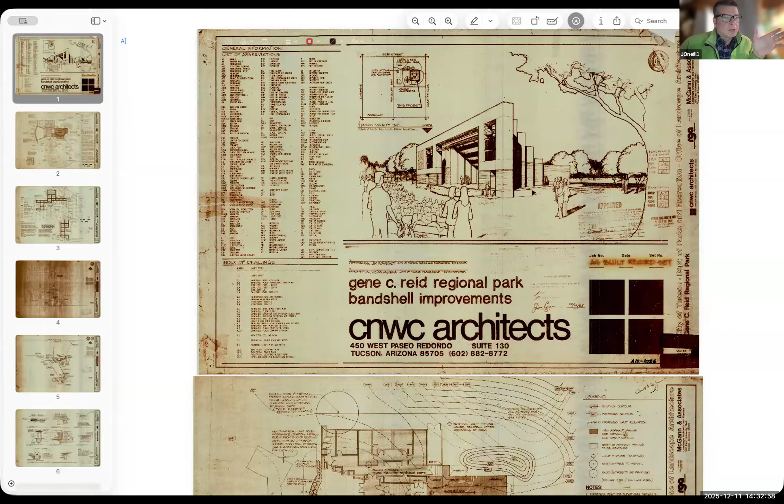Well, it's also to preserve the acoustic clarity. Let me share this image again. There's an opening between the front facade and the back of the stage, and we want to seal that up with the extended roof so the sound quality isn't bleeding off into the neighborhoods and is more projected out to the audience. And the angle of these surfaces is in alignment with the existing angle of the acoustic baffles, which is all intended to help project that sound further out into the audience area.

We're also raising those lighting positions and pushing them out far enough to light the stage. So if we brought all of this down within the opening of the existing proscenium, it would drop that overall opening lower than ideal for both the lighting and acoustic performance of the shell itself. Understood, good point—I understand your concern though. We went back and forth on ways to do this, and creating this very clear armature that does what we need while leaving the building pretty much intact seemed to be a good compromise between those two things.

Okay, what else did I have? The landscape committee suggestions, I agree with all those. I appreciate all those. The freestanding canopies also I thought looked great.

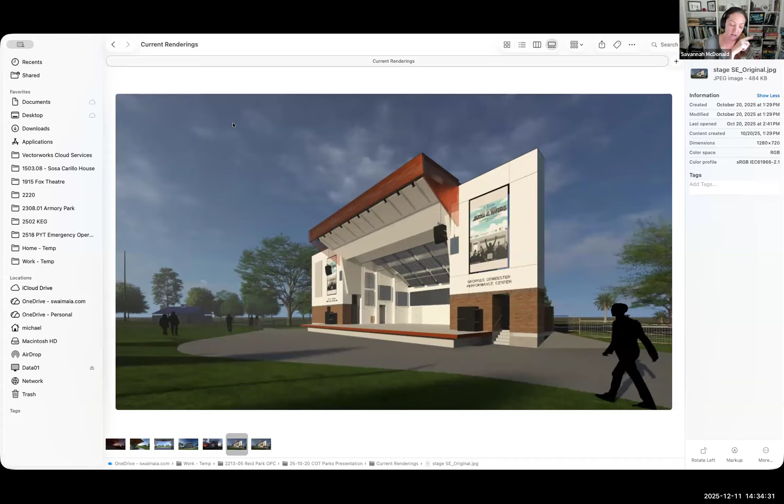My last question is, you have all this accessibility to the food trucks. Does that get all the way incorporated so that people could get onto the stage in an accessible way? Or is it kind of like a back ramp back there somewhere? You'd have to go around the back of the facility, and that brings you up onto the stage.

That's what I had, thank you. Thank you, Savannah. Before I call on Andrew, I just want to mention that a couple people have referred to the landscape committee - it's the historic landscape subcommittee, not to be confused with anything else. They do a lot of reviews for us on landscape aspects in parks.

Okay, Andrew, I think you are the one we need to hear from. Sure, yeah, I have lots of thoughts on it. This park is near and dear to me. First off, I love all the improvements you're making up on the top of the hill. I think that's fantastic - that'll do so much to give it kind of a real entrance, which it's really lacking right now. So that's great.

The need for the fencing is totally understood. I know it's a huge burden, and a lot of groups simply can't pay to do all the temp fencing, so I think that'll make it a much more accessible space to groups with less funding. I agree with the comments from HLC on the addition of more gates and more openness. I'm happy to hear that the gates are going to be locked open during non-ticketed events. That's one of the great parts of that landscape right now - it's contiguous with the park and it's a great picnic spot and everything. So keeping that as free-flowing as we can with the greater context of the park would be great. I appreciate all that.